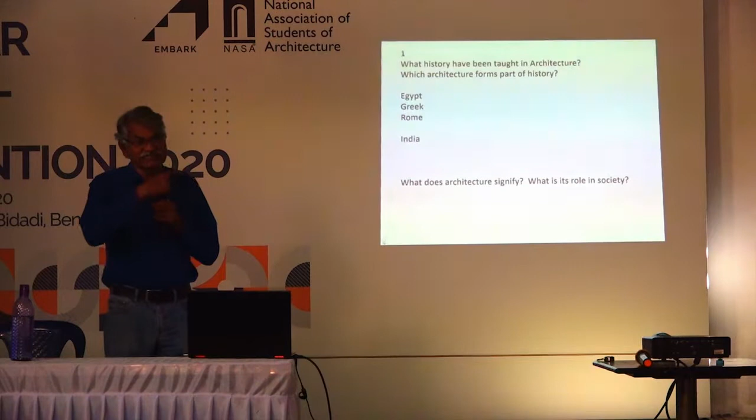So that is what I am going to talk about, and basically I will be showing a lot of visuals, even though I don't believe in visuals. Okay. Can you read this? Yes? Okay. Even if you're not able to read, it is only for my clue. I will be repeating it. Sorry.

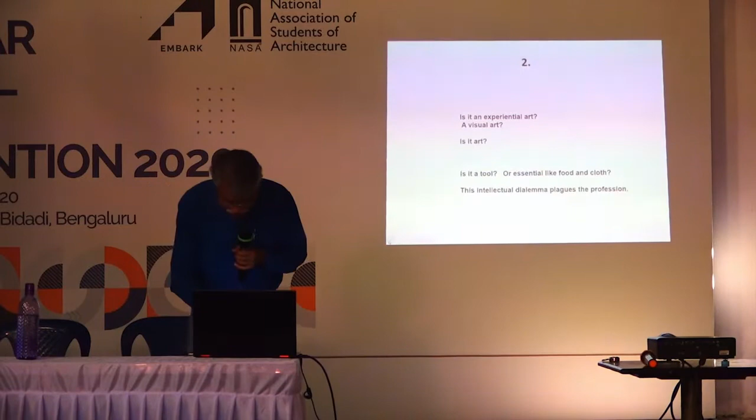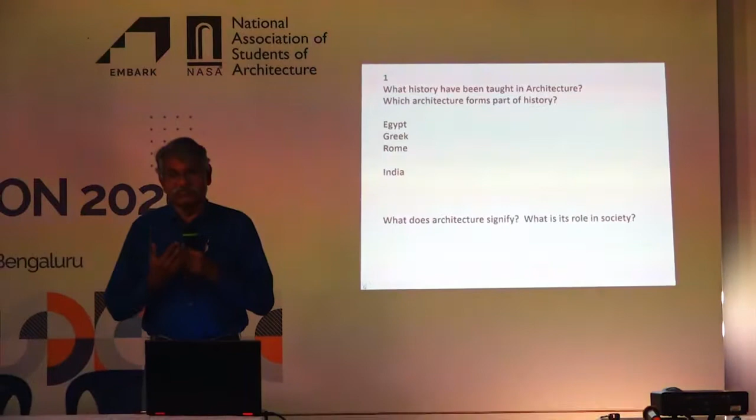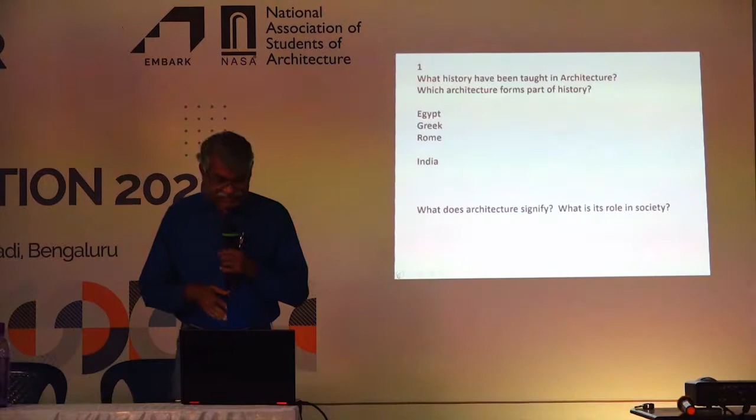See, all of you are put through some lessons of history, right? Even if you are in the first year, or second year, third year, some lesson of history you have been taught about architecture. What is the history of architecture you have been taught? Or which architecture forms part of that history? Just think about what you have been taught. You have been taught about Egyptian architecture, Greek architecture, Roman architecture, and part of Indian architecture, Islamic and Hindu period, and even later.

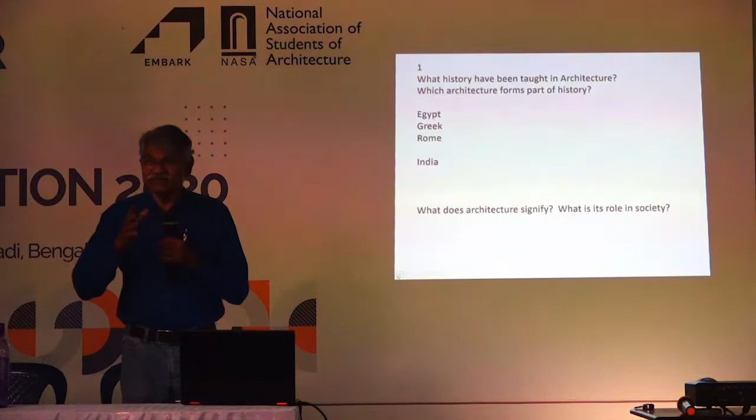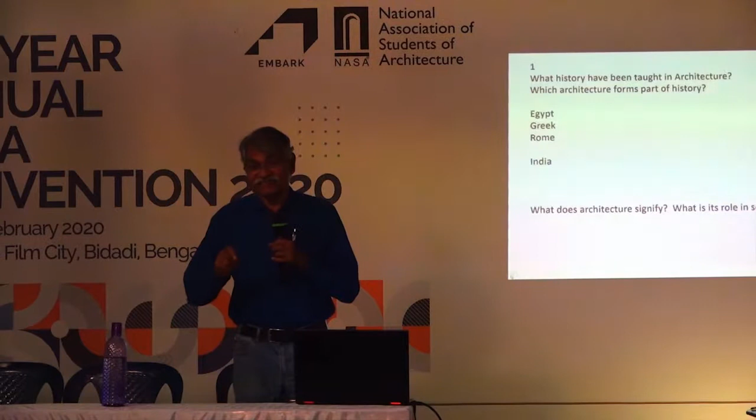So all these have been classified into certain eras of history, as has been understood by historians who wrote about people, their kings, their politics, their conquests, things like that.

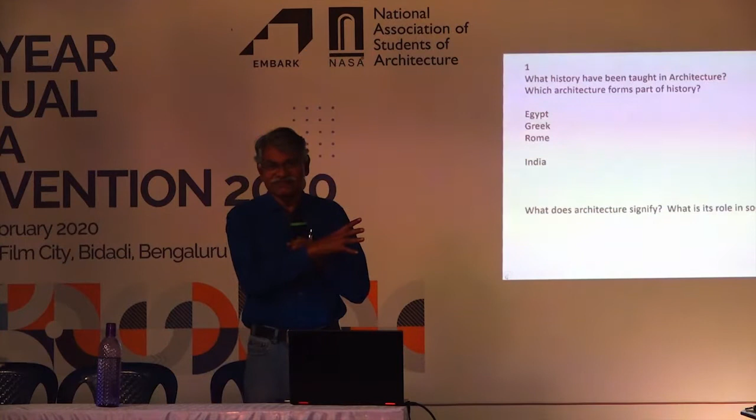And architecture which has been part of that. So what do we know about Egypt? Anything about Egyptian architecture? 2,500 to 3,000 years ago, there were some buildings or some archetypes which were created and left behind by rulers. That is the thing we know.

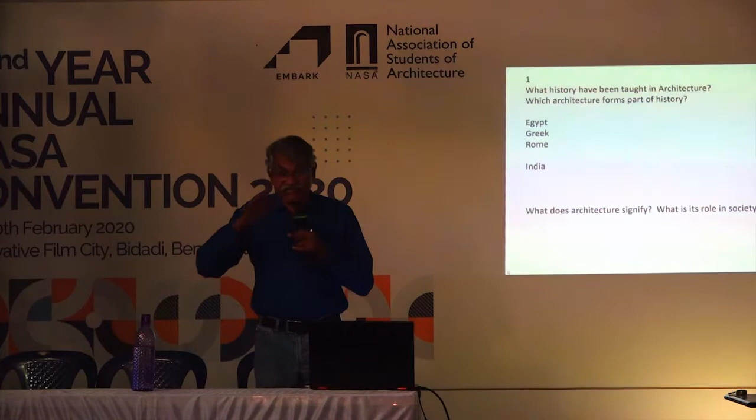Most importantly, the pyramids. There are pyramids not only in Egypt, Mesopotamia, in South America. There have been pyramids, huge things which they have created. When they did not have the technology which we have, they created it. That we know. That is the only history we know. And some things which they worship, the temples they worship.

Same thing about Greek architecture. We know about the Parthenon. We know about the Agora marketplace where the leaders, upper elite people met. All that we know. But very little, whether it is Indian architecture or the same thing. We know about the huge things that happened in India. In fact, we know very little about Indian architecture which happened in the early times.

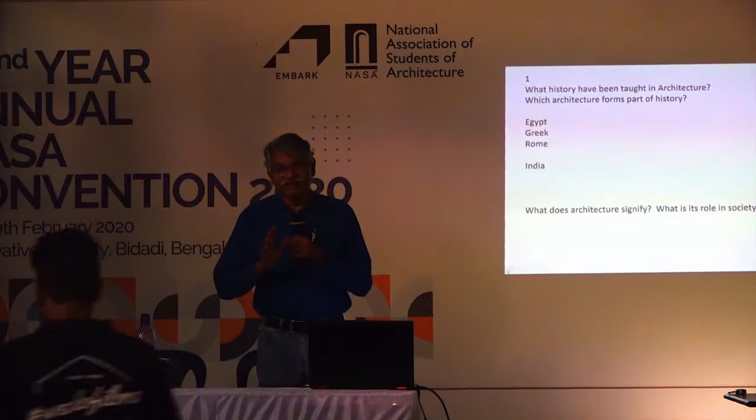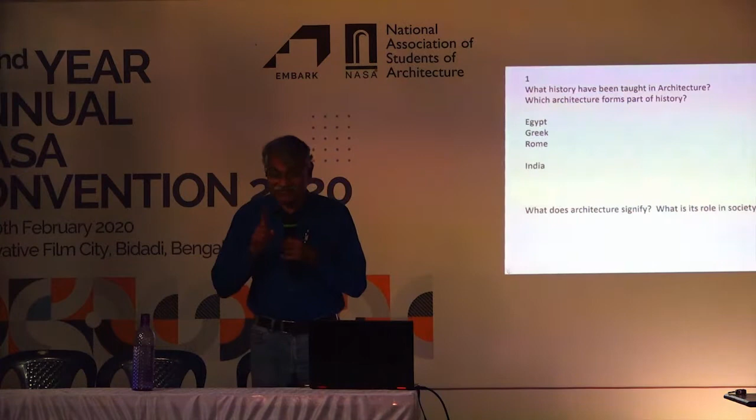Very little. Not because they were destroyed, but because Indian culture has not been so much into building big things at that time. Our culture was different. So we are left with a history of architecture of bigness, big things, big achievements, big things built to commemorate the power of the rulers. That is what we call vast architecture. That is what we have learned as architecture.

The same thing continues. And all the theory of architecture which is taught to us is about looking at that kind of architecture which is a celebration of power in the society. The power could be in terms of physical power, who wins physically, or power in terms of money so that they can buy others, or power in terms of calculated connivance or cunning ways in which they can influence. That is the architecture we know about.

But is that the only architecture that we know? What we have come out of it is architecture that is visual. So we think that architecture is a visual art, like painting or anything like that. So it is a visual art. We have learned it, we are learning it, we are looking at it that way.

Now, even art for that matter, it happens only above the level of food survival. If you are a gatherer, if you are hunting every day and you are striving for food, you have very little time to think about art or architecture. Art is something that happens. It's a search for pleasure, which is above the level of food survival. Then only architecture comes. Architecture is one of the fundamental reasons for human existence.

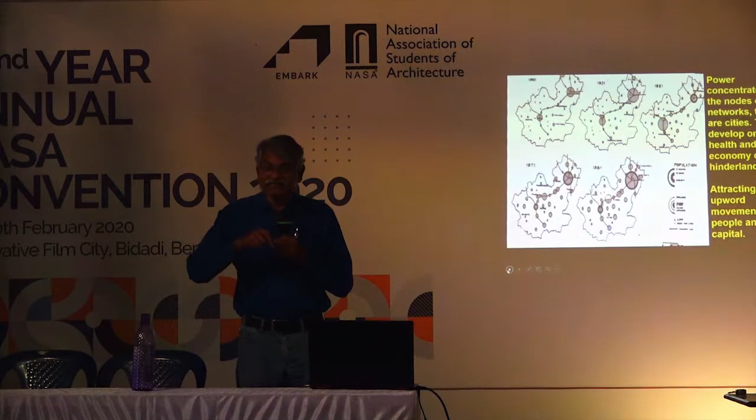If you look at Bangalore, Mysore, or any region, we have people settled everywhere where there was water. Water is fundamental, so where there was water. And then, over a period of time, they had to communicate. Roads, paths, places of communication, methods of communication. And that communication is what we call networks, early networks. It could be paths, trails, things like that. People met each other, moved, through which armies moved.

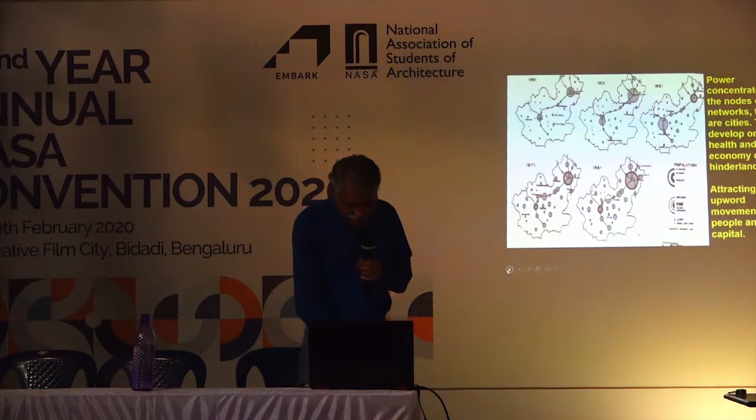So those networks. And networks made certain places concentrated, power concentrated. And that attracted development of those places, so cities and towns. If you look at how the towns and cities have increased in size in the last one century, it is something which I wonder about.

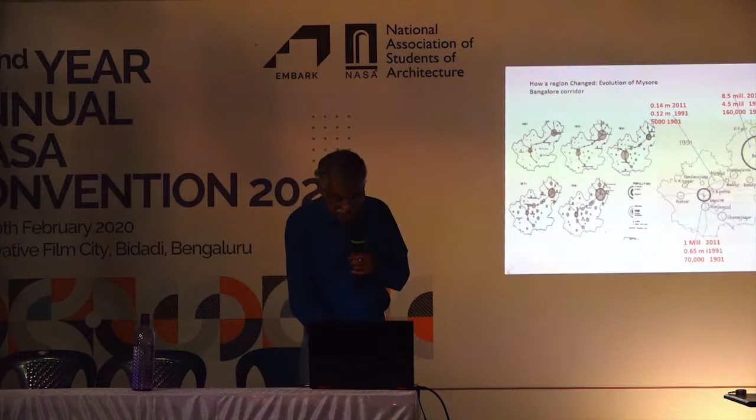So networks and activities is what pushes us to modern living, this modern society and economy, which states efficiency, speed. Speed is the most important thing human beings have pursued. So these two things: efficiency, do things faster, do things better with lesser amount of energy, and do things faster. That is one thing, efficiency, lesser amount of energy, and do it faster, speed. These two are the fundamentals on which we are evolving over the years.

Human evolution has slowed down now. And basically, it is the physical strength and the strength of our efficiency, which is something to do with our brains, that has been going up very fast. But our senses, seeing, hearing, touching, the emotions that come out of the other senses, that has not matched the kind of acceleration in which human efficiency and other machine efficiencies increased. So that is a fundamental point.

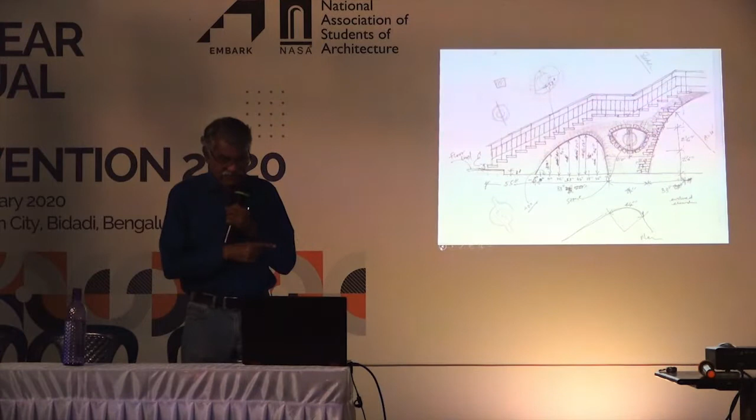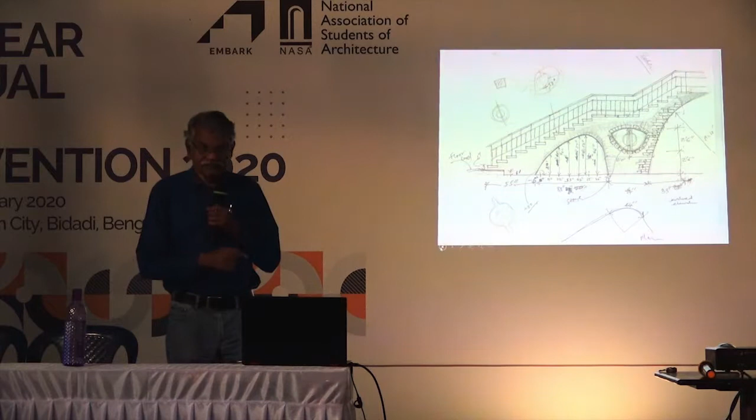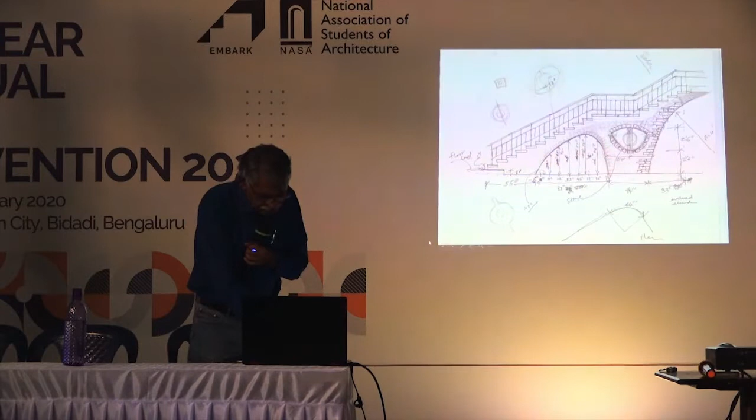So this is a staircase on one side and the corridor, done by a sketch like this—the basics is a curved path and the wall is curved, but it is straightened out and drawn like this, which gives all the dimensions. It is not to scale, it cannot be scaled, and the masons just did this using this basic information. And they built this corridor and the staircase, which is a very simple method.

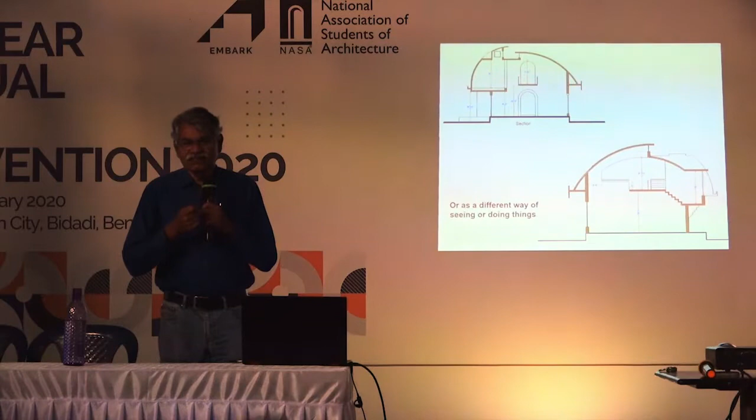A number of houses were built, only 12 of them were completed because it was a government project. The contractor gave up, he said, I can't do it. So the project fell through, it stopped there. It was given to allottees, 12 people bought it, but they did not keep it as it is. Over a period, they removed many of the walls, put a concrete slab and built over it.

So the meaning of this is that people are not so much worried about their house, they are more worried about their living. And the houses which we provide, the government provides, for very low income people, it doesn't remain with the low income people. Because those low income people who we give it for 5,000 rupees are the people who do not have enough income to repay that loan.

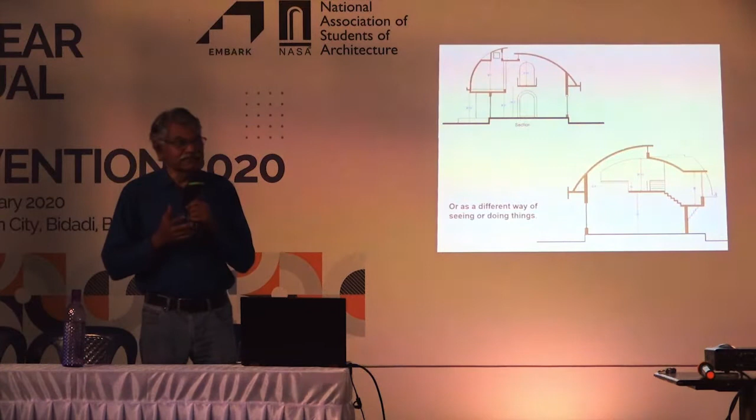So a house is allotted along with the loan. They don't have a regular income to pay that loan. When they don't have that regular income, they sell it. And the person who buys it doesn't look at it as a small house, he looks at it as a site which can be built upon. So finally, we are building something not for the person who is occupying the house, but for the person who is imaginary.

That is the main problem with the failure of most mass housing architecture. It has happened everywhere, not only in India. It doesn't remain with the people, it changes hands. Fundamentally, the people at the low end of the spectrum are not interested in a house, they are interested in a regular income. Employment becomes more important for them.

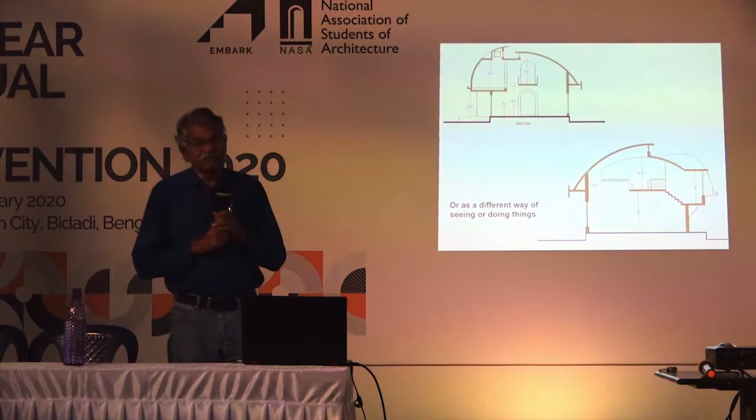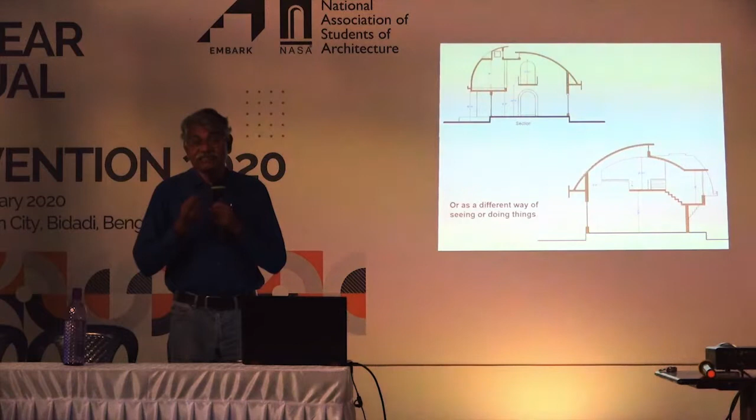We gave up that idea, but built the same idea several years later when the Vice Chancellor of Mysore University asked for it. Not that he couldn't afford a better house, but he was more interested in its shape. It is again the whole idea of elitist architecture - how it looks is more important than how it functions.

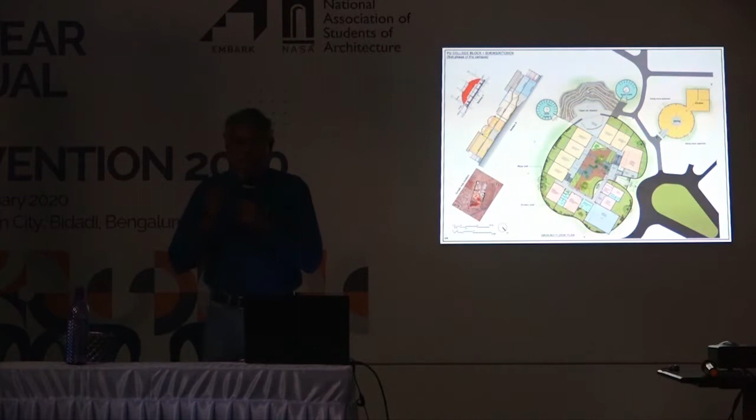So this is the part of the first building which we built. It's a PUC college, that is junior college, or +2. The whole place has water scarcity and is too hot in summer. It can go up to 45 degrees or even more. And it can come down to 8 degrees in winter, extremes. And then water is not easily available. Rainfall is scanty. And landscaping, which requires a lot of water, is almost impossible.

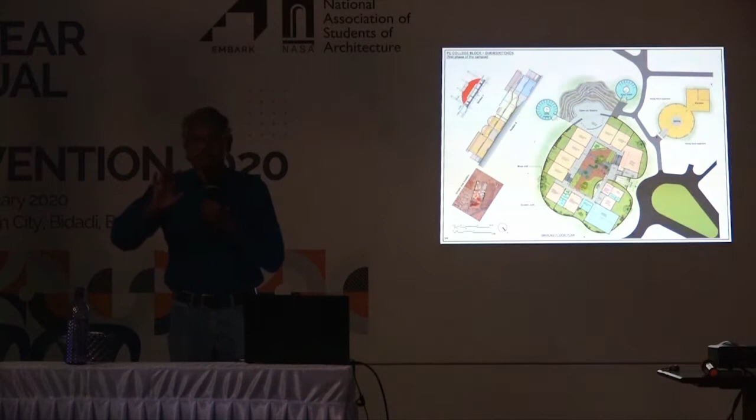And wind is very heavy, and the dust is also there. So we have to take these considerations to build this school. And the soil is only 2 feet on rock. Below that is full of rock. Deccan trap, the black granite, if you call it. So that is the soil condition.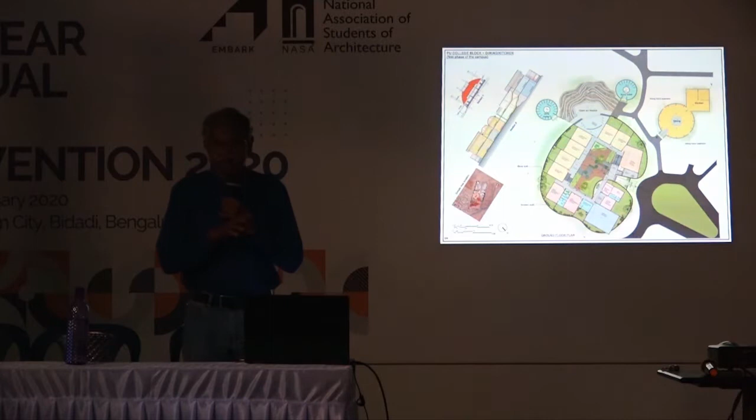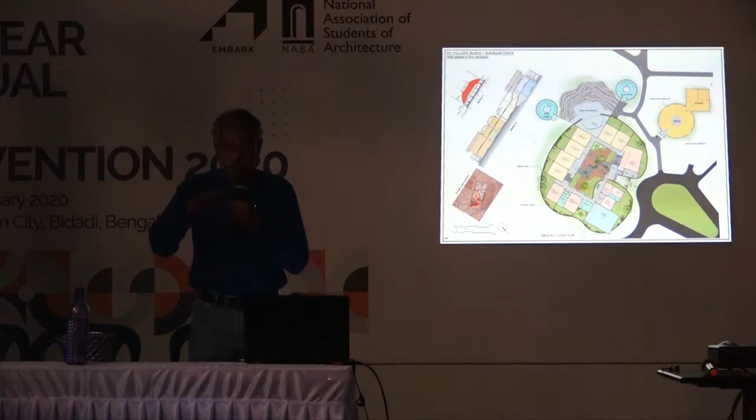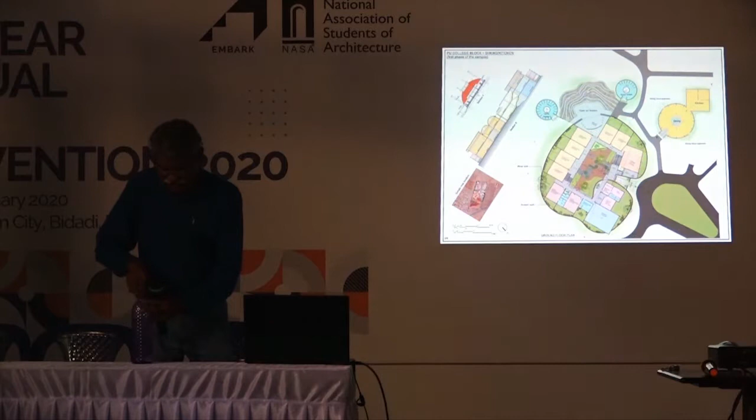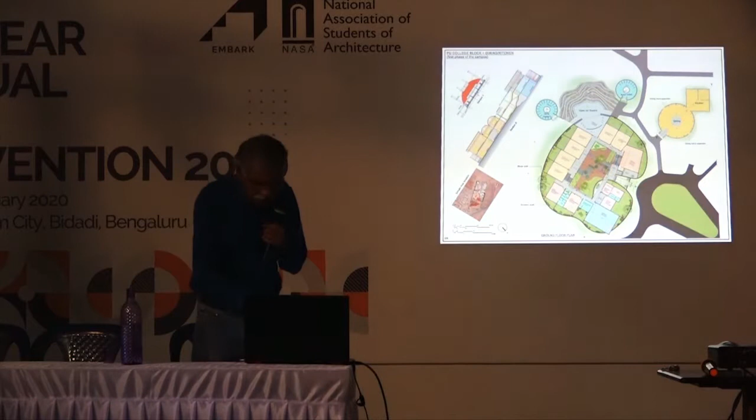So we designed this with a courtyard in the middle and took half of the building partially below ground. We buried half of the building about 6 feet below. We excavated that part. The top part, which you see auditorium, open air theater on the side, if you take it diagonally, that whole part, the southern part, we excavated 6 feet below.

When you excavate that 6 feet below, you will have to excavate removing the rock. That black rock, we used it for many construction purposes, including making jelly out of it for concreting, or stones for making some walls, all that was done here. Okay. Now this is the plan.

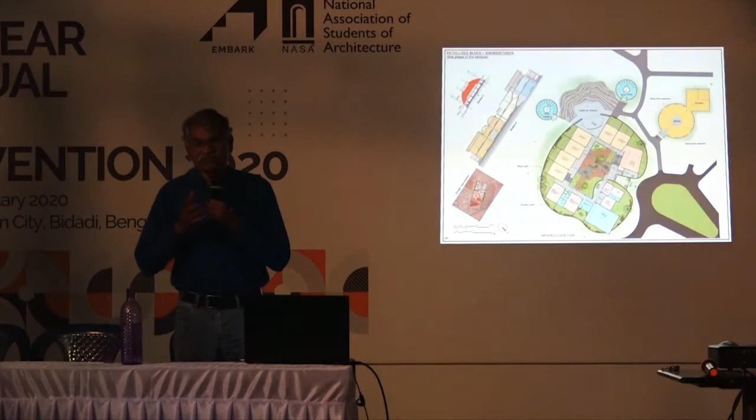And we also decided that because landscaping is too difficult, too costly, too water consuming, we created a meandering wall around this building, which is 10 to 15 feet away from the wall of the classrooms or any rooms, and that wall is a perforated wall, so that the air will move in, filtered with a jali, and in between this space is the only space which we landscape. So when you sit in the classroom, you see that space is landscaped. Beyond that is dry.

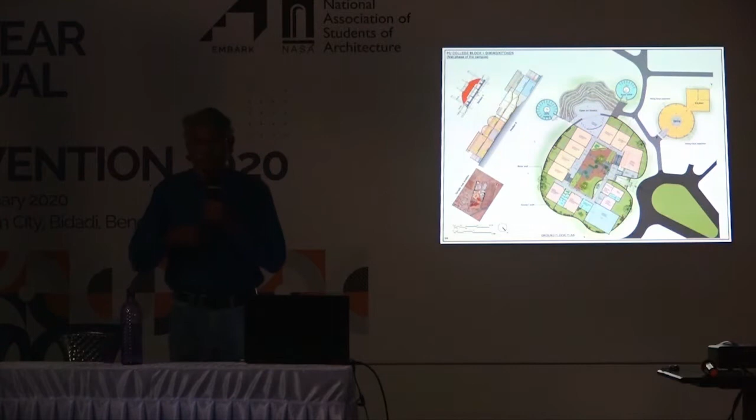But now they have planted some trees also. Certain types of trees do grow, which can grow in the shallow soil, and also with the recycling of water which we are using for the school. Okay. Now, this is the first floor and the second floor and the elevation.

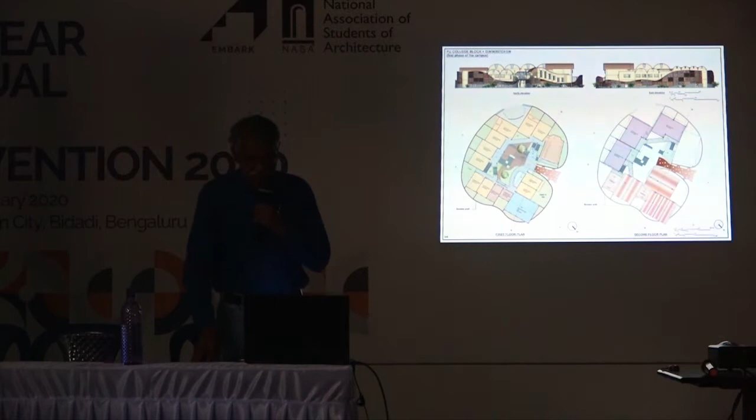So we decided also that the top roof is going to be very, very hot, because concrete or anything which you use on the roof will absorb heat during daytime and radiate in the night, and also in the afternoon. It will be impossible to sit there. So we thought of a hollow roof using hollow clay block, and to create a vault out of it. That hollow clay vault spans the entire classroom, 27 feet or 8 to 9 meters. We have to span it, and that too without centering. If we do centering, it will be costly.

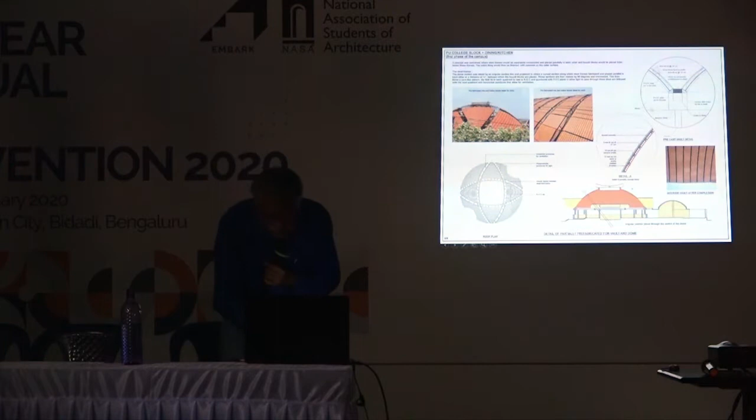So we decided on a partially prefabricated vault, as I have shown you in that house. There it was not prefabricated, not even partially, it was with a centering. Here it is a larger span, so we prefabricated the vault. How? You see the section here, see this, there is no pointer, so this space.

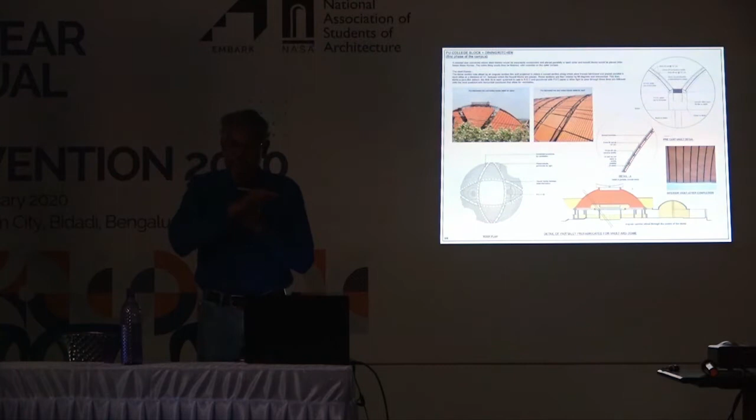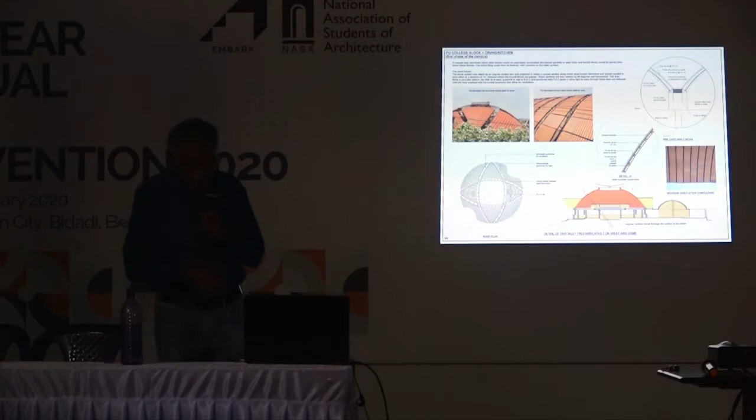There are steel ribs. On that, hollow blocks sit on the side, like they hang on it. And above that, there are shear connectors and thermal reinforcement is put on top of it. And then you can pour concrete. So you can see that photograph there, the top left, that is the vault just before concreting. And after all that is done, this is the upper roof. So this is how it looks.

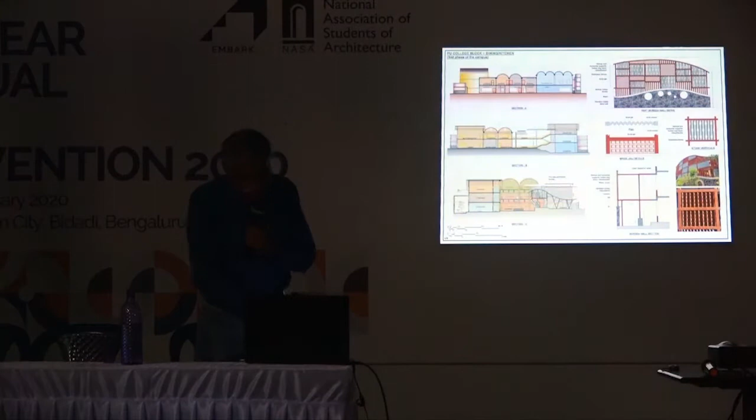And the wall all around. That wall is a perforated wall. We have a framework created, a concrete framework, that was created with much supervision by the engineer and the masons. There is concrete inside a hollow block, horizontally and vertically. Once that is done, there are two ways of filling that.

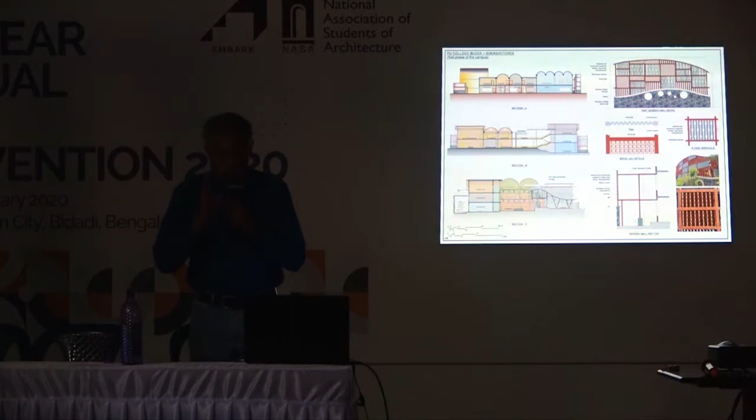One is a jolly work using hollow bricks, and the other is by cutting a Shahabad stone, thin Shahabad stone, a 10-inch stone slab, and it is cut, two cuts on one side, one cut on the other side, and then allow them to put it vertically down, the grey color one, and that could be done by the people as they feel good. They can put it like this, or they can put it upside down, or turn it this way.

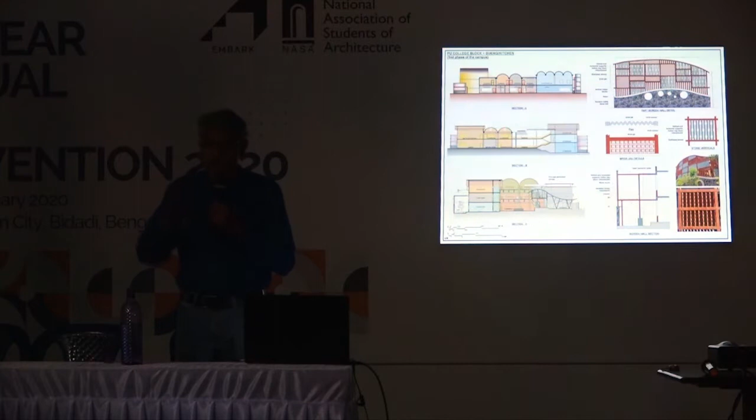So it is as to what they feel good. And they can also choose which one to use where. So the whole idea is ours, but the execution is basically theirs. This is how it looks now. The stone, the brick jolly, all that is there. Nothing is similar. It is enormous variety.

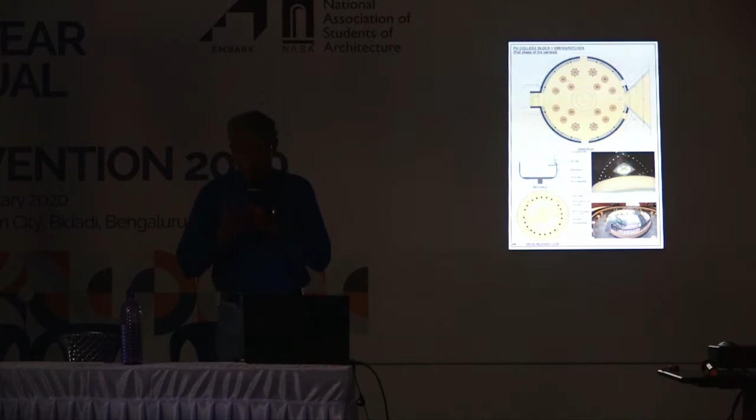Using that form as something which could be made in a much cheaper way, better way, and also which is more human, where the children will enjoy dining. So it's a dining hall we created. A 60 feet diameter free space with a little mezzanine, and about 300 people can sit here or stand.

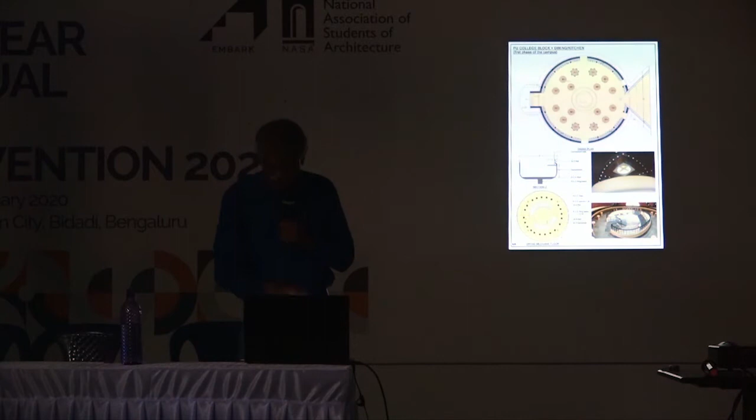And this is how it was made. The dome was made without centering. The pipes were bent, 12 pipes were bent to give the shape. And once the concrete comes, these pipes were removed and taken away. This is the process of building. So we have to work out the way in which the ribs can be straight and parallel. So it's a parametric design, geometrically worked out using 3D design.

Now you cannot do it in two-dimensional drawings. You will have to do it in three-dimensional modeling only, find out how it could be worked out and how it could change direction where it becomes difficult. And where you find the large gaps, some concrete will come, that is for structural reasons.

And this is how it looked when it was completed, and this is how it looks now, and this is how it looks from inside. So in the concrete ribs, there are 4 of them, and inside that we have kept vertical plastic pipes, and each pipe will have a glass cover. So the rain will not come inside, but the light will come. So it looks like this, a series of lights on top in daytime. This is the total panoramic view of that.

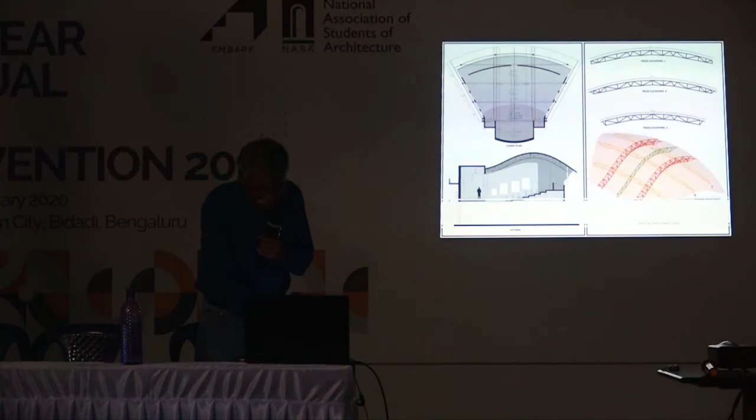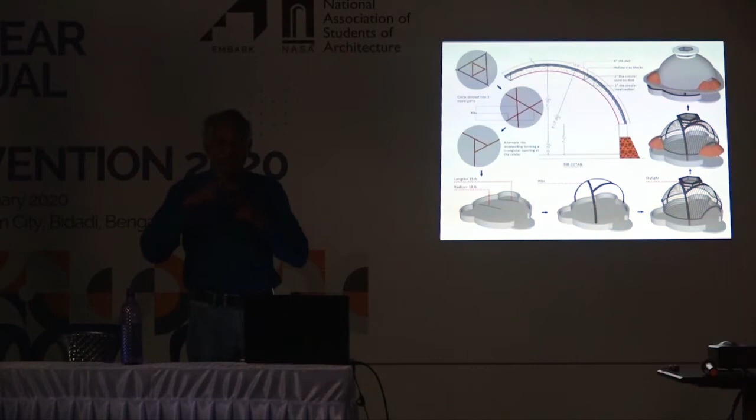This is how the auditorium is conceived as 2 curves intersecting, and both are made of 3D space structures. So this is the dining hall. And the second time when we built the small domes, 35 feet diameter, we tried to use triangulation. The plan uses the intersection of 3 trusses together in a triangular fashion, which is much more stable than what we did in the first case as 2 intersecting rectangles.

So this is the way in which it was to be built. And this is actually an animation, which I don't have here. And this is how they have built it finally. The screed concrete was being built. They are applying screed on top of it. Now, originally we thought we'll use shotcreting. We found a person to quote for it from Mysore, from Bangalore.

There are 3 domes and 2 walls together, totally 8,000 square feet. It was good enough for him for 2 days of work, but he asked 1,200 rupees per square foot as the application cost. Finally, they got labor organized and did it. It took more than 3 weeks because each dome took about a week. But it cost them 1/10 of it. Against 1,200 per square foot, it cost them around 100 rupees. So it is 1/10 of the cost.

So actually, nobody is to be blamed. The costlier the materials, the costlier the technology, it's largely because the people who are involved with that technology are paid more, correct? And the machineries are costly. So that is why it is too costly. But if the masons are raised to a somewhat intermediate level, and if they are paid a little more, they will do a much better job, perhaps. But this is something beyond how we get involved with the building industry. This is how it looks inside.